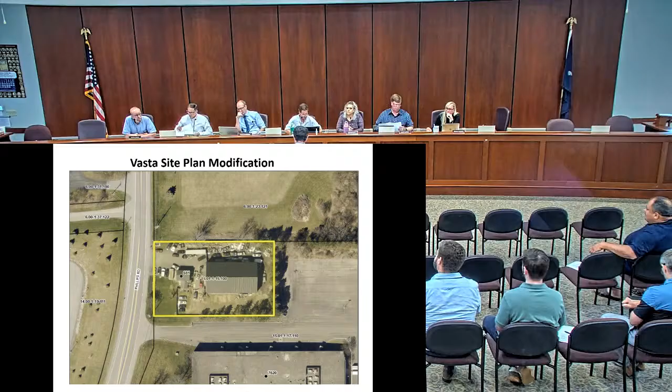Good evening, members of the board. My name is Kyle Twombly with APD Engineering and Architecture. I think we're all pretty familiar with this project at this point, so I wanted to first see if the board wanted to take this in any direction, or if I should start going through the letter that I prepared, outlining what we've changed between the last meeting and this meeting.

Does the board have an interest in just going straight to his letter or other items? I'm fine with that. All right, why don't you proceed then with any changes, updates. Okay, fine, the site plan.

So the changes we made between the last meeting and this one is we've created an existing conditions map. The existing conditions map separates existing conditions from the proposed improvements that Mr. Vasta would implement. All the existing and the proposed were previously on just one site plan, so we've separated that.

We've included existing storage areas on the site, which included spare parts, miscellaneous items, trailer storage, and trailer storage between the residential house and the pole barn. I specified with call-out notes that all of these areas would be cleaned up and the storage would be moved into the rear of the property, which you can see on the site plan.

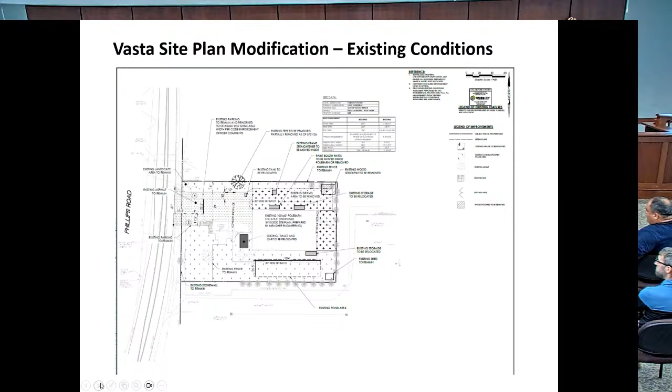There was an existing wood pile at the northeast corner of the site that was observed by members of the planning board during their site walk. They preferred if this was removed, and Mr. Vasta will remove the wood pile. That is noted on the existing conditions map.

There is a maple tree at the northwest corner of the existing fence along the northern boundary of the site, which is in pretty poor condition. As of May 21st, when I visited the site, it was partially removed. Okay, so that tree has been removed. If you go to the site plan, there are 3 proposed new trees along that boundary to assist with improving the screening in that area.

We added a call-out: Mr. Vasta is going to rework the striping in front of the property, and as part of this reworking, he is going to restripe it per the 22.5 foot minimum drive aisle width, which was noted in the code enforcement officer's comments. And then on to the site plan.

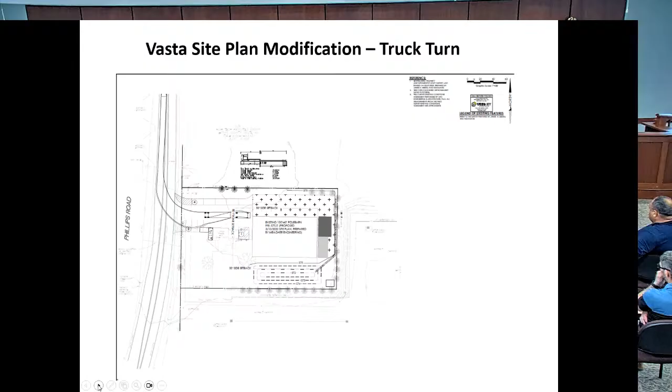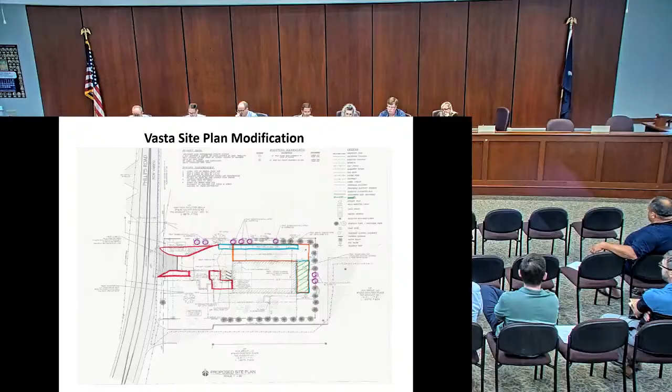I'll ask a couple of questions and open it up to the board. The site plan that you're showing existing information, the wood pile and the storage and everything, says existing storage to be relocated in at least two places, and then the paint booth parts to be moved inside the pole barn or removed. Are you stating in one of the other plans, is it all going to be in the back of the barn, I'll call it the east side of the barn? Is that where the new storage location is going to be?

Yes, that would be, other than the paint booth parts, which would be moved inside. A couple of items called out on there are just going to be removed altogether, but the storage areas would all be relocated to the east side of the pole barn.

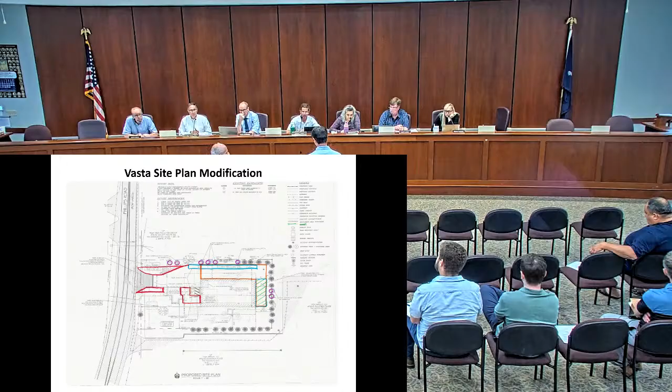So will they have a rack system or shelving for the outdoor equipment to keep it organized instead of piled? I think we discussed you may do some scaffolding back there. I'm going to step up to the mic if that would be helpful. Yeah, any scaffolding we're going to put directly behind the building.

So all the storage will be on scaffolding behind the building? Yeah, with the exception, obviously, of the trailer. And will that storage interfere with the location that you're proposing for the vent for the paint booth?

No, the scaffolding or shelving is going to be below fence level, and the vents are going to be higher, so they're not going to be interfering with each other. So the storage scaffolding with all the equipment on it will be lower than where the paint booth exhaust is? Is that correct? Yep. Oh, okay, so when you're looking at the fence, you're not going to see scaffolding above the fence.

So anybody driving by, they're just going to see a fence, not parts or whatever. It's actually there on the west side, and you're talking about east side storage, so you've got the building also shielding the view of that. Either way, whichever way you're driving, I have stuff on one side right now and some on the other side, but it's going to all be put behind the building, not on the side of the building.

Okay, great. All right, board members, Al?

Joe? I think it's much improved, and I think the existing, along with the new proposed, helps bring clarity to it. But I'd just like to reinforce that anything not depicted on the proposed site plan would therefore be inconsistent with the site plan approval. In other words, it can't be there. That's all I have, Joe.

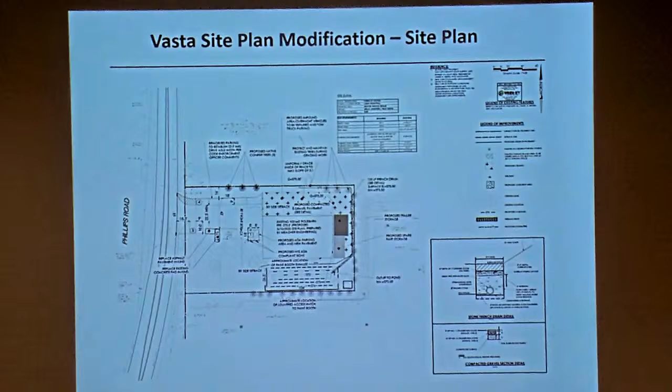Do you have an engineering section as to what the base and sub-base is going to look like for the gravel area? There is a detail down here in the bottom right of C2, that would be the gravel section area, but once you move north of the gravel, there's actually probably about 10 feet to the property fence that would be open grass. So you'll grade that to the bottom of what fence is there, right?

Yes, 'cause I remember seeing gaps and things, and it seemed like that's what you were trying to convey. Yes. So it was a little difficult to draw that in as a detail. We have the existing survey from 2020, but those are not the conditions out there anymore. So we tried to draw in at least a contour on what we're trying to accomplish, and then a note to make sure that everything around the fence was uniformly graded with a designated maximum slope towards the gravel and eventually to the French drain along the east side.

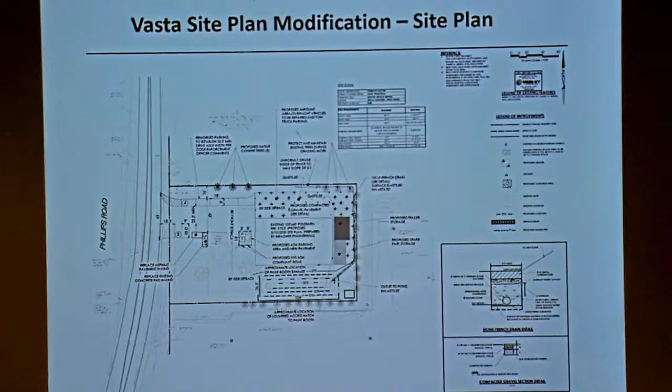Okay, I'm seeing the contour you're referring to. I think it's 575 along the north fence and wrapping around to the east. Yes, correct. Okay, I guess I'll defer to our engineer for his comments as well.

So Wes, thoughts on the details they've provided? Yeah, so this is the first I'm looking at the plans, so I'd like to have Mary take a look at the French drain, our stormwater person. But I think they're improved from what we've seen in the past, so I don't know that we have much to comment on.

I think, as indicated at the beginning of the discussion, we're not ready to move on this one because we just received this today, I think, right? This morning. So we updated, give our consultant until the next meeting to evaluate anything that's been provided. I think, hearing from the board, everything you've addressed to what hopefully will be our satisfaction, it seems like you should be able to move forward, save for any comments we may get from our consultants.

Do you have anything else for us that you need? I don't think so, not on our end, Max. Okay, all right. Unless anyone else has any other comments?

I just wanted to mention to Wes that there's a comment from the watershed, or from the stormwater manager for the town, regarding vehicles and fluids that may leak from vehicles with respect to stormwater, and having impervious cover beneath them if they are outside. So I just wanted to have you forward that to Mary for her review. Sure thing, okay, yep.

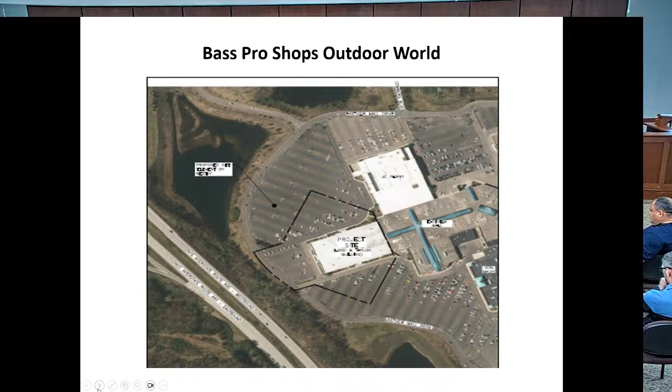One comment from the May 12th letter from Labella concerned the capacity of the sanitary sewer system and how operation of the aquarium at the store could impact that system. We had a conference call last week with representatives from Bass Pro Shops, the town, and Labella to work through a plan ensuring the aquarium's operation wouldn't negatively impact sanitary sewer capacity. We agreed on terms of approval that constrain when the tank can be operated, flow rate maximums that can't be exceeded, and dates and times restricting operations to mornings during non-peak shopping hours, avoiding alignment with residential peaks. I believe that comment was satisfied.

We've made some minor revisions to the elevations and signage. I believe this elevation, since the last time we were here, now shows the tower at 72 feet, so you can see that in relation to the rest of the building.

Just some renderings, nothing's really changed on any of these other elevations.

I had a quick question about those elevations, you're showing ATVs, boats, and things like that on grass, but the plan shows pavers. Which is accurate? It's the pavers on the plans -- the rendering isn't exact on the landscape. The areas identified as part of the special use permit would be the only areas allowed for those seasonal outdoor sales.

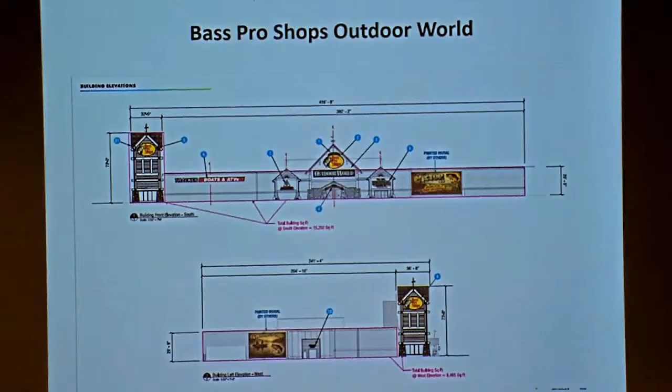Just some minor modifications to the brand book. Again, the elevations have been updated to show the correct tower height.

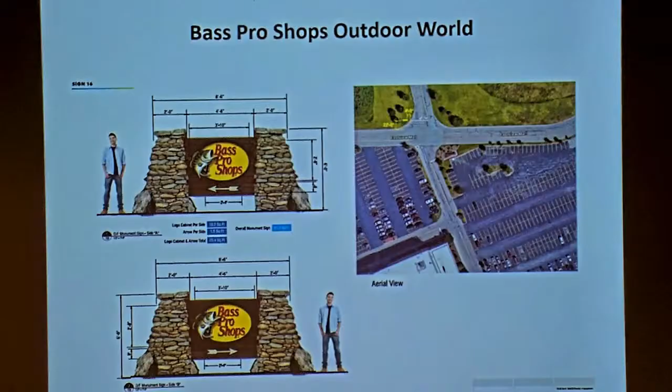There's been some refinement to the location of signs 16, 17, and 18. The signs are still the same size, just moved to align with the site plan so everything corresponds with one another -- the same distances are represented in the brand book as on the site plan. This sign hasn't changed. There were some errors in the background images used, so those were updated. The dimensions for sign 17 have been updated to align with the site plan.

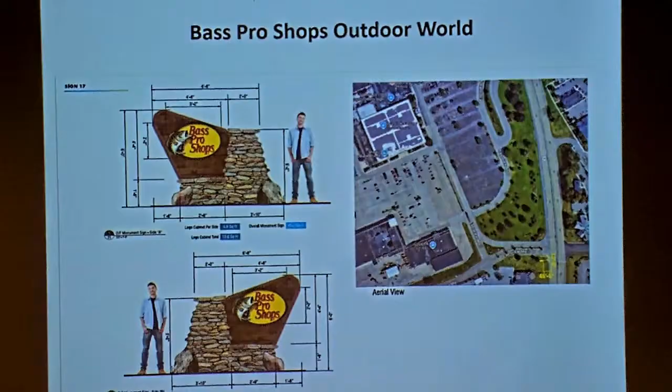Some additional views of that sign. And then the Pork Chop Island sign has been positioned to avoid existing easements on that island -- it now sits between an electrical easement and a telephone easement. Again, the sign hasn't changed size, it's just been positioned to avoid those easements.

I drove through there this morning and noted where you were calling for that sign. I was thinking it would be further down, but by the time you get down to the further sign, you're past everything, near where the other mall interior directional signage is. I personally am fine with what you're showing.

Other than that, there's really nothing else -- the last image just shows what that tower is going to look like from Route 96, that perspective. So to this point, I believe we've addressed all the comments and concerns, and would be happy to answer any other questions the board might have.

Start at this end of the table, Scott. I don't have any questions, I think it's a good project. Trish? I agree, I think it's a very exciting project.

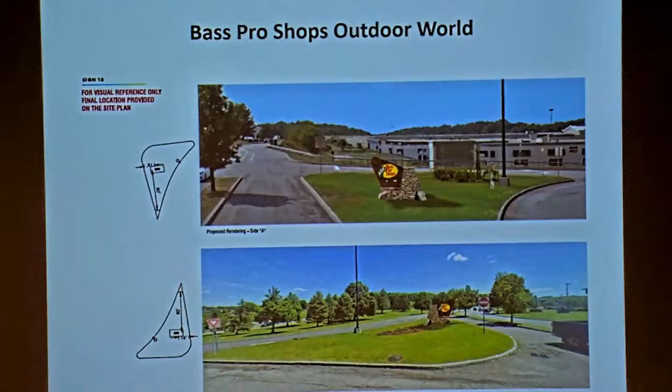And one of the renderings I saw flashed on the screen - is there a flagpole on top of the building? No, maybe that was just in front of the building. There's one in front of the building, yeah, that actually is a pole that goes all the way down - it might be hard to see in that image. Is it on or in the middle of the building? It's off to the left, in front, hard to see in this image, but it's in that landscaped area in front of the store. The pole goes all the way down to the ground. I misunderstood what you just told me, Wes, so - it's helpful, thanks.

Okay, and nothing from me. I think you guys go a long way to address everything. You've gotten your variances, signage looks fine. So we do have a proposed draft resolution here. If you guys are okay with moving this forward, we'll do that.

Lisa just reminded me the public hearing's still open, so I'll entertain a motion to close it. Before that, I should ask if there's anyone from the public that has any comments at this meeting before we close it. Hearing none, I'll hear a motion. Al moves, Joe seconds. All in favor? Aye. Public hearing is closed.

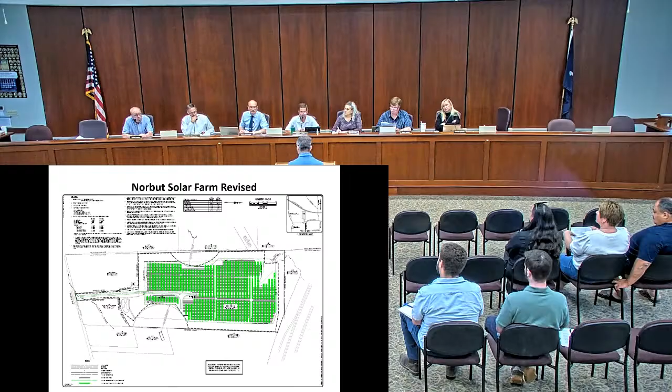We use that view shed study to help select all the locations for the glare study. There were a few questions on the glare study—one was to provide a location map. So we prepared an exhibit for Labella that corresponds with the glare study, identifying all the observation points. It's a little hard to see with the scale, but these red text markers are observation points for Group 1 and Group 2, basically all the single-family residential homes, which were all modeled at a 16-foot viewing height for the second-story window.

There are two other observation points not included on this map: one is 500 feet above the Strong Memorial helicopter pad, and the other is at the airport's air traffic control tower. Obviously, there's no glare at any of these locations according to the report.

All the other locations are these blue lines, which are the various road segments based on areas of potential visibility from the view shed study. What this does is we perform the analysis on the road segments at 5 feet and 9 feet heights, which is a passenger car and a truck driver height, to identify potential visibility. Same thing—no visibility was identified, or glare, for these, as expected, on any of these road segments.

That's very much supported by the fact that a lot of the board members were at the site. If you're just standing there with the existing vegetation, especially at the southern end, which is where more of the visibility would be to the neighbors, there wasn't a lot of visibility even of the adjacent properties with that existing vegetation. We wouldn't see this from Fisher's Park—I know that area was brought up. This whole area is wooded, so as soon as you get into that, you wouldn't have visibility of that anyway.

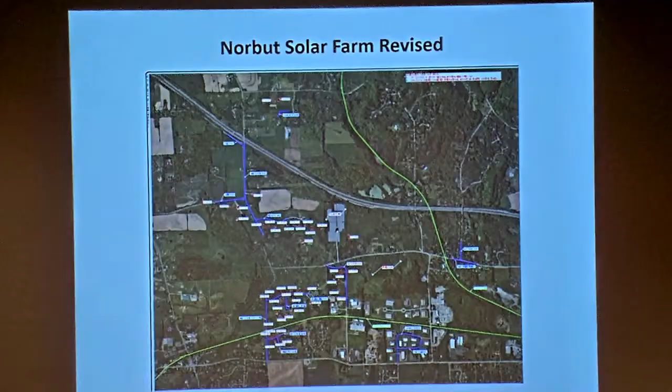So I'm struggling with this glare. From what I'm reading, the panels are horizontal overnight, and then they come up prior to the sun coming up, and then they're going to go horizontal again after sundown.

Correct. I'm looking at the graph. It shows low incidence angles and high incident angles, correct? And there's no glare as they're following. I mean, how far do they go before sundown?

So basically how the panels operate, at night they're in a stowing position. They are at 0 degrees, laying flat. At some point prior to sunrise, they rotate to a 60-degree tilt, which will be this scenario right here, where they're at a 60-degree tilt from horizontal.

So then, in theory, when the sun first comes up in the morning, these panels are at 60 degrees, and your sun rays at 0 are coming horizontal across, just as the sun's cresting up. Because the panel's at a 60-degree tilt, those sun rays that are moving horizontal then get reflected up into the sky. So there's no way that this sun, from even a horizontal angle, is going to shoot glare down.

What was happening before with the static panels is instead of these being 60 degrees to the east, they were 60 degrees facing south. So when you have that sun here, they would hit the front of this panel and then go straight to the west and cause glare to the west. And then the opposite would happen at sunset, where the sun would be over here, they'd come and hit that panel facing south and then shoot to the east.

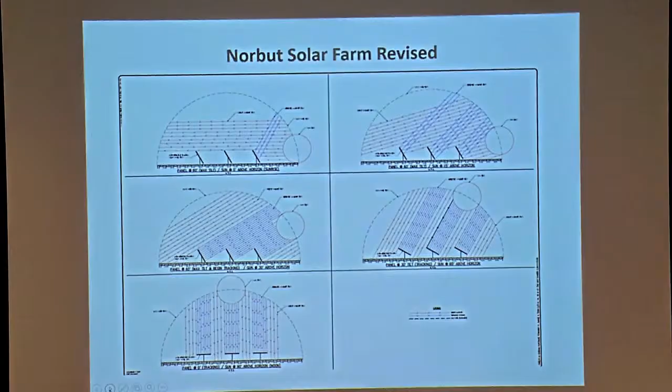And then the location to the east, we have a bunch of landscaping proposed in this area, which we are maintaining, again based on our site walk, and this being an emergent growth hedgerow. It's not like trees and vegetation, it's very dense—you can't see through it in the summertime.

And half the board was on site and saw that. But adjacent to the house, we are supplementing with additional landscaping. And that would probably be our answer to start, if there is a glare location out there—how can we go out there and just plant some more trees and vegetation and mitigate that?

And because of the heights of the panels and the reflection angles, we're not talking about anything crazy. These panels are only 12-foot max by code, and we're actually somewhere in the 9 to 10-foot max height. So once you factor in those things, you can plant a couple 10-foot trees and really block any visibility in specific locations if we need to.

A lot of these trees here that we've already accounted for, we're going to field locate based on when the panels are constructed to minimize visibility and do sight lines. If we need to take a couple plants from here and put them in spots over here to create some additional visibility, which I don't expect to, or even if we needed to do some additional at the north between us and the thruway, that's something we would just take care of. Norbut doesn't want any liabilities from glare causing issues on adjacent properties, especially roadways or something like the thruway.

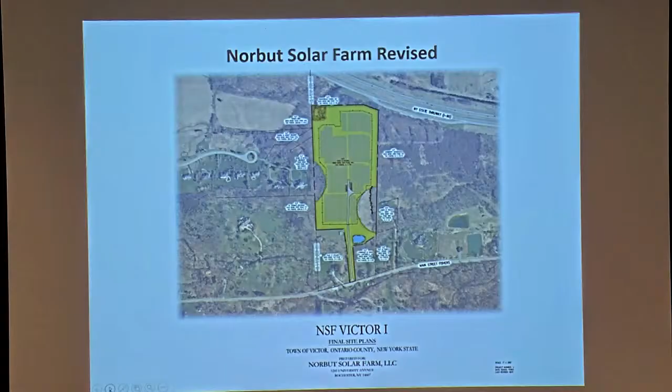I will open up the floor if there's anyone here who wishes to question, comment, or make a statement about this project. Now's the time. And Susie, let me know if anybody online has any comments.

I just want to point out that the Grays did send an email with a couple of photos and a comment regarding the glare. I'll just read it, it's short.

Please find attached 2 photos due west at less than 16-foot perspective. It is a before-panel-installation view, so it shows the clearing, it shows the trees in the distance from the Gray's house, which is the house on the east for those who are listening.

So the proposed new panels will face directly at the real property at 8016 Main Street, Fishers at sunrise. Yes, they will. They'll be at 60 degrees, as I understand it, James, with a near-perfect reflection of hundreds out of the thousands of panels to be installed, will most definitely cause a breach of codes. I'm not sure how that relates to the code. I don't see that.

These new proposed larger panels, James, do you say they were smaller or? They're consistent. Same size, just a different mechanism to support them and move them.

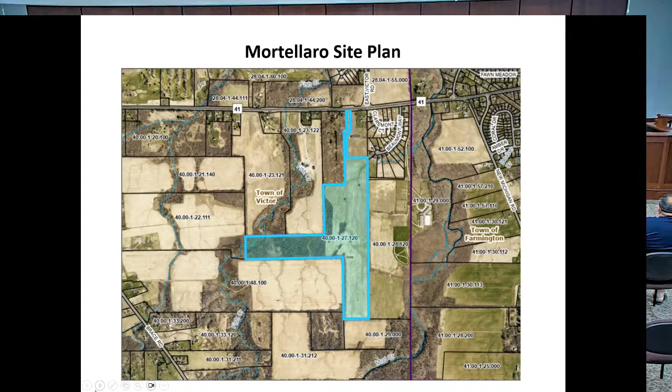You're probably aware that the driveway and the irrigation pond were constructed last year. Matt wanted to get the driveway in so he could get his farm equipment back there. It was impassable. The driveway grade at County Road 41 was very, very steep. So the driveway was mostly constructed last year.

There's still some finish-up work to do on the driveway. The intention of the driveway at that time was a farm access driveway. It was not intended for residential use, even though, let's face it, Matt owns a lot of property out there. It's nice property. He had envisioned putting a house out there at some point in time. His plans were accelerated, so we're here the next year to hopefully get everything straightened out with the driveway, with the house, with the wastewater treatment system.

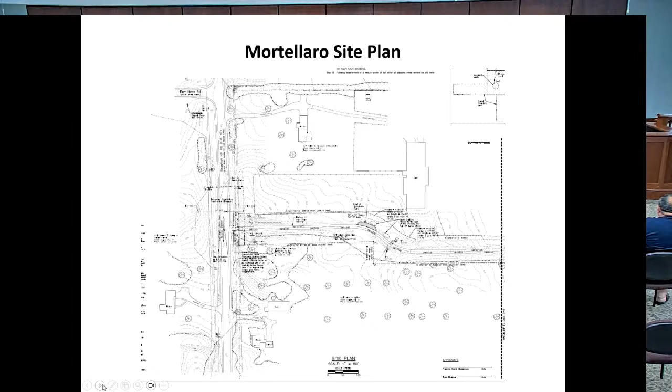And I think the most important topic that's come up is fire access and fire protection. So there's been a number of emails back and forth, comment letters. We've addressed most of them except for the ones that arrived today. I don't think there's anything new in these comment letters.

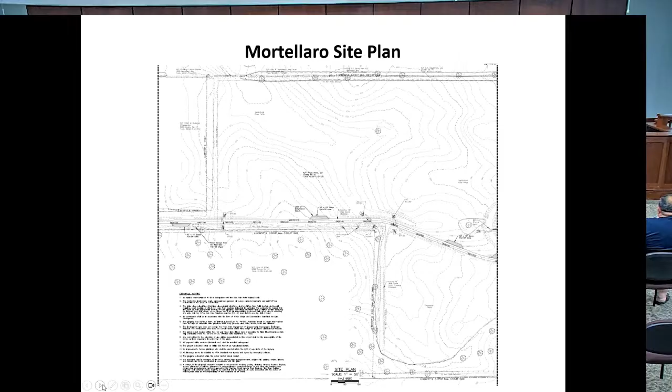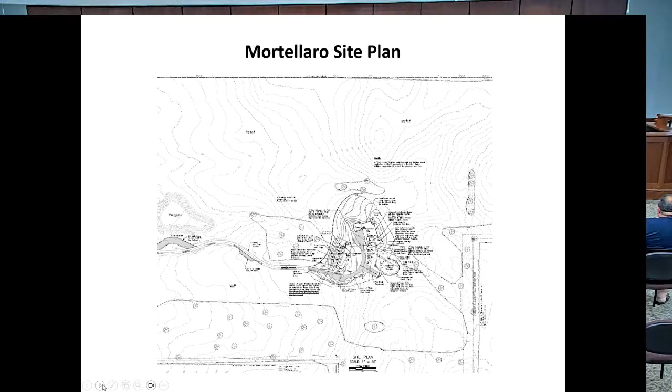We received Wes's letter, which has a few comments that I think can most easily be addressed by just giving you a set of plans that were submitted last year for the driveway and the irrigation pond. Those plans include a lot of information you were looking for. Of course, we can add that information to the current set of site plans for the residence as well.

Some of the comments will require some additional work on the driveway, the pull-off areas, to satisfy the fire code and the fire marshal. We've agreed we will contact town representatives to come out to witness the test holes that are going to be dug in the driveway to verify the construction meets town code and fire code for support of emergency response equipment. We have no problems with that. We just haven't scheduled that yet.

That'll probably come sometime in the future, maybe when you start building your house, because, I mean, if there are any deficiencies, obviously we will have to address those before a C of O would be issued for the house.

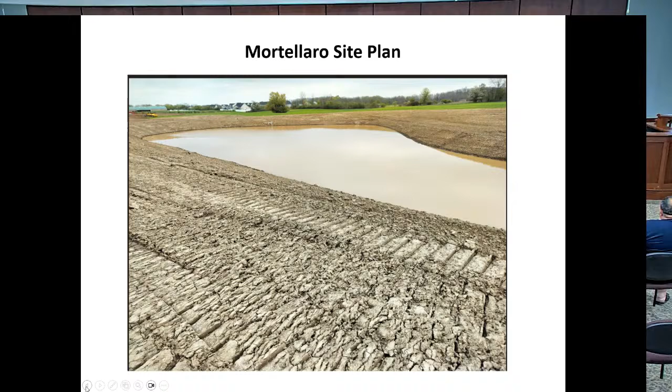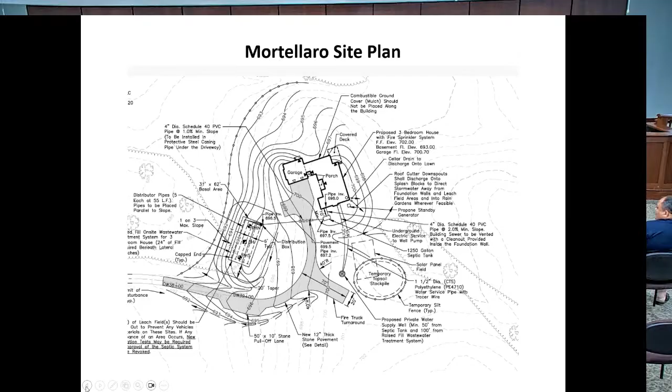We're still confused about the proximity of a water supply to fight fires versus the provision of a fire protection sprinkler system in the house. Matt has agreed he will have the house fully sprinklered for fire protection, but there's some confusion about future use of the irrigation pond and the dry hydrant for fire department use.

Right now, we're convinced the dry hydrant system was installed in accordance with the fire code, but we have no proof to present to the town that it was, and the town did not have the ability to inspect, witness the installation of the system. So of course, the fire marshal has concerns about the dry hydrant system.

Also, what was previously proposed was just kind of a straight-in approach to the dry hydrant for use by the fire department. They requested more of a pull-off area with proximity to the fire lane, access lane, immediately adjacent to the hydrant. So we have shown that on the plans, and that would only be built if the pond will be used for fire protection.

At this point in time, we're not sure if it's needed by code to provide fire protection water or not, since the house is being sprinklered. So we've got to get that addressed, but whatever's required, we will do.

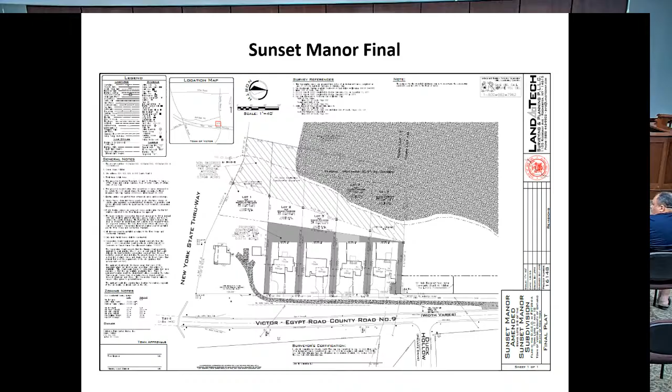And the owner of Lot 1, who would have to sign these conservation easements for them to exist, the Polidori's can't just sign them because they no longer have control over Lot 1. The owner is not willing to sign the easements. Again, they've been working on this since September. The Polidori's have been involved, the town supervisor has spoken to the owner, and I think at least 2 different attorneys have tried to answer questions. The owner of Lot 1 is still not comfortable signing the easements.

So the town staff has worked with the Polidori's to come up with an alternative to this. They still, in order to build the other 4 homes, have to meet their 50% open space on the subdivision, and they lose the space on Lot 1.

So one of the things, and LaBella was involved with this too, one of the things we suggested to them, similar to what Scott DeHollander did over on Scout Path, where he used some of his side setbacks on the lots for conservation easement. We proposed that to the Polidori's, and they worked with their engineer Land Tech to come up with the proposal that you're currently looking at.

So again, there were 2 different kinds of conservation easements. One of them was most restrictive, which was in the very back, very west side of the project, encompassing the federal wetlands, which makes sense. The second kind of conservation easement was least restrictive, so you can mow, it would go over lawn area, which is why they went down this road with their engineer while working with us.

So they pulled, as you can see, the gray space is the least restrictive conservation easement that has been enlarged. It comes closer to the homes, and then, based on the model previously approved for Scout Path, at least that I know of, there may be more, they ran the least restrictive easement down the side setbacks.

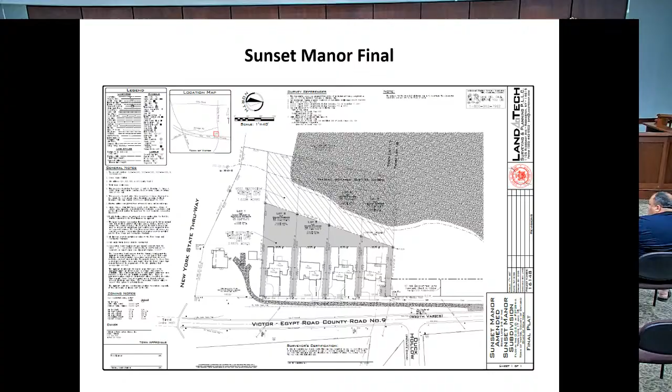So, collectively, we've been trying to work on a solution with the Polidori's so that they can move forward with the project with the other 4 homes and still meet the town code for the 50% open space. This is what we've all collectively come up with.

Order of operations: the planning, so there has to be a modification, which is what they're here for tonight, to modify their final subdivision approval from back in 2017. We've also prepared, with the town attorney, the Polidori's, and their engineer, new easements. When I say new easements, again, the easements were never filed, so they didn't exist. But different easements, I'll say, than what was originally proposed.

So the planning board would need to approve this step, which is why we're all here today, so that the chairman and town engineer would be able to sign the modified site plan so that it could be filed along with the revised easements. So with that, if you have any questions for me, the Polidori's are also here if you have any questions for them.

Thanks, Keith. I appreciate the background and the explanation for why we're actually here. I may have expressed this in our conversations, but a couple of these lots are very close in terms of not being able to build structures on the least restrictive conservation easement. Are these going to be marked out, and what's to keep them from putting a swimming pool beyond the limit? So, for instance, like any other subdivision, for any of those structures, they would have to come to us with a permit.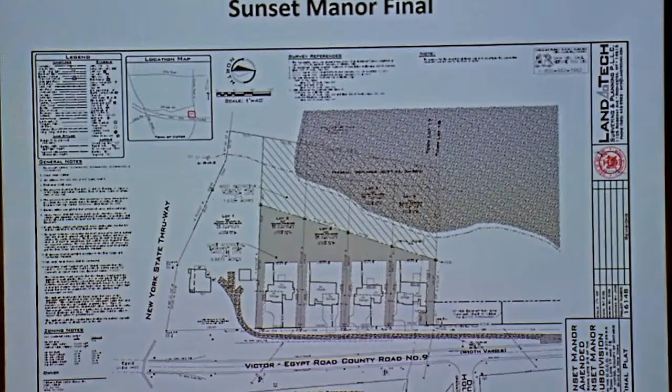So it works now for us. Okay, as long as they can be stay clear away from them, they're well established. Conservation easements.

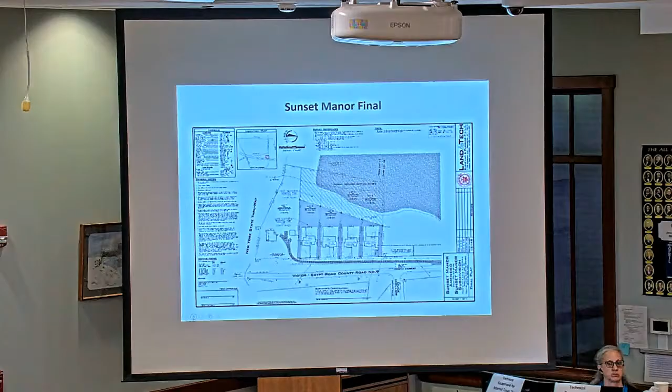When we close on each lot, they're gonna have a survey map. And the survey - well, that's still on there. That's gone now, right? Correct, yeah, this is the older map. Yeah, I think the one up there is clear.

So lot 1 has no conservation, correct - and there's an existing farmhouse. What do they have in their packet, the map I have that shows it on lot 1? Okay, so that was the original, to try and illustrate to everybody what was happening here.

The map on the screen, to Mr. Polidori's, is the new map, right? So that's what will actually be signed and filed with the county. That clearly shows there's no conservation easement space on lot 1. All right, so it sounds like you're going to put 4 pins, 8 pins in it.

At the backside of those conservation, or non-conservation easement areas, that'll call it. That'll be delineating, after, before CO of course. And it looks like they all line up, is that true? All 4 lots have all that line in a row, and it makes it easy, should be easy. And I'll make sure I make the homeowners aware.

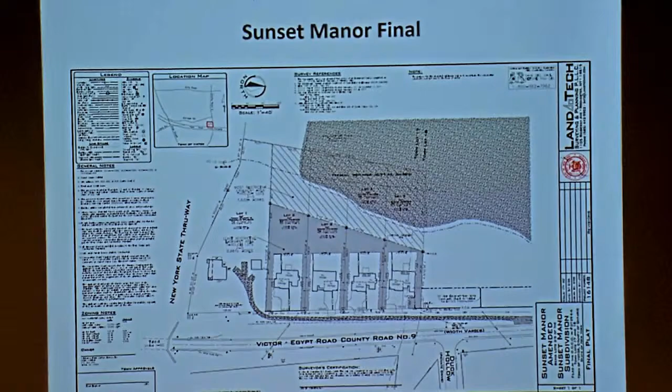No, it's pins now, it's pins. In spots, yeah, I think there's still trees? We'll work with you guys on that to delineate on the plans exactly what's what.

I talked to Adam real quick at the end of the day. I think you probably talked to more than I did today. I think he was most concerned with monuments on the inside corners that Mara was just pointing at. I think still trees on the lot lines between the 2 lots, and then on separating the least restrictive from the most restrictive, that makes sense. But we'll work with you guys to make sure that that's clear on the plans.

There'll be a little sign either in the woods marking the most restricted area. There's a little sign, right? Yeah, 4x4. It's got to be on every point of intersection between the lots. The corners, and the corners of the easements inside the lots.

Did I miss anything from what Adam said on that? Nope, like I said, I wasn't super involved with those conversations today. All right, I will let the rest of the board talk, because I've been doing it all, so, Al?

I was just gonna say, given the loss of the easement on lot 1, I think this is a very practical solution, so I'm kind of with what's being proposed. I agree, I think this is a real smart solution. It works.

Scott? Yep, I've done this in Farmington before. And just on the new map there, which is different than the one I have, you probably won't be setting a conservation marker on Lot 1, correct? So you want to delete that, maybe?